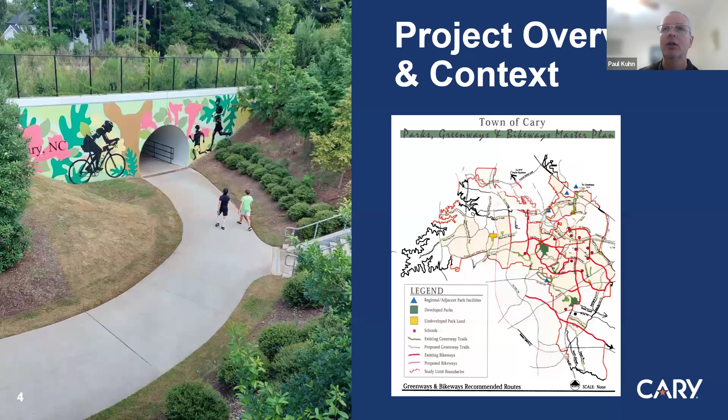Just to give you a bigger picture, around this time the East Coast Greenway was working on designating the alignment on the East Coast. When Cary heard about it, we wanted to jump on board and be part of connecting Maine to Florida, being part of that 3,000-mile trail. I'm pretty sure most people on this call are familiar with that, so I won't go into much more detail.

For Cary, we're approaching right around 100 miles of paved greenways within our trail network. In 2019, we celebrated 40 years of greenways within Cary. As Cary has grown, we've worked with development and developers to build many of those trails, and then some of the more challenging ones we've come back and built ourselves, and this is one of those. Cary currently has a population of roughly 180,000 people.

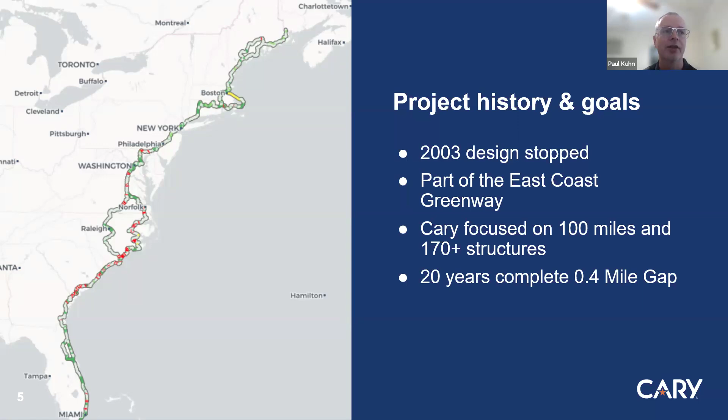On those 100 miles of trails, we have over 170 structures that we have to maintain, ranging from boardwalks, bridges, and tunnels. Our public works team is always looking at new projects and asking how we can reduce the maintenance we're having to do, because they're out there all the time maintaining them.

So around 2003, we were really focused on this map - you can see Cary in yellow. If you look closely, you can see the White Oak Creek Greenway labeled here, and then the Black Creek Greenway, connecting in Bond Park. This was really our big push, because we were trying to connect the American Tobacco Trail, which is on the west side of the county, up to Umstead State Park.

So Cary had those two great connections we could make. By making those connections, we were able to connect to Durham, Raleigh, and some of the other connections shown on this map, including the Neuse River Greenway, which is the trail on the far east side of the map and the east side of the county. That's obviously a big trail.

Raleigh's done a really good job with that trail connection. So being able to connect Durham to Johnston County was our goal. You can see this map was from when we were working on the project - we really had this one little gap that we needed to complete the whole network we had.

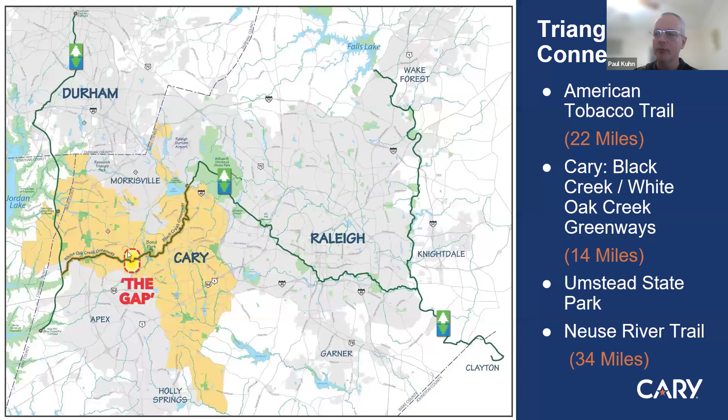We had a park over by Davis Drive that we would be going through, and you can see it was threaded through a narrow HOA property. When the neighborhood developed, they granted Cary an easement on this property. So that was part of Kimley-Horn's challenge, trying to thread this trail through that sliver of property along a creek - there's a sewer, and then there's a railroad. That's probably one of the biggest and most unique things about this project, working with the railroad.

For our elected officials, when we came to them and said, hey, we want to work on this project, we want to restart it because it's completing this big gap, they wanted to be part of the East Coast Greenway. They wanted to be part of something bigger than just something in Cary, so it was an easy sell to them.

I think everybody's probably familiar with the Appalachian Trail. So when you explain the East Coast Greenway as being kind of that urban version of it, it was a no-brainer for people to understand what we were trying to do.

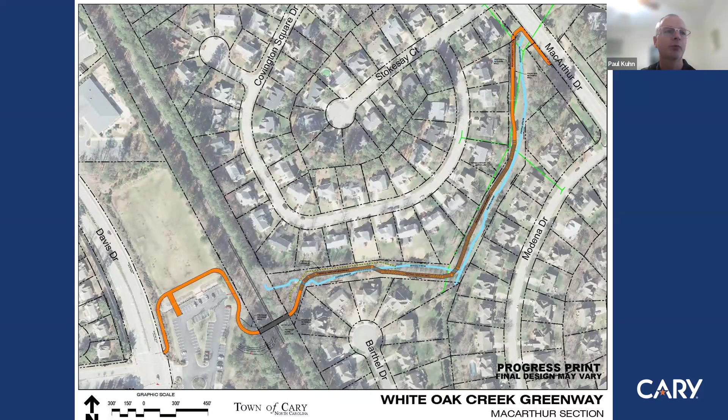So in 2012, Cary had a parks bond referendum for $15.87 million. A portion of that funding, roughly $2.5 million, was identified to complete this missing gap on the Greenway. The bond passed at 77% approval.

Once we had that money, that allowed us to start design and look to leverage that funding to go after other grants. So in 2015, we went after grant funding through NCDOT and our local MPO, and we ultimately got $3.8 million in grants. The total project cost was $9 million for this 0.4 of a mile greenway.

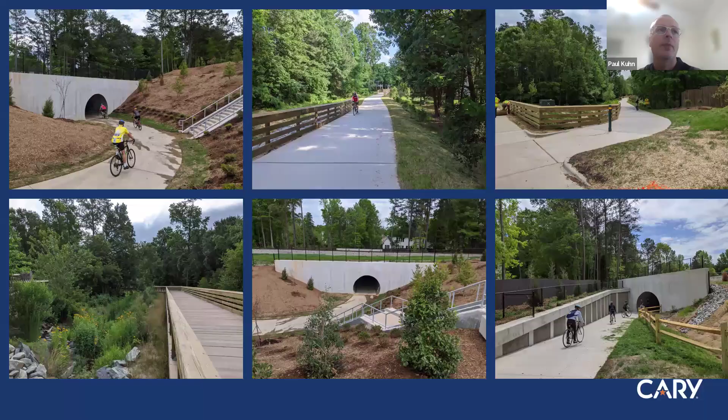Here's a few images we took relatively after construction was completed. You can kind of see the tunnel, some of the boardwalk, some of the connections that were made. I like looking at this picture now because if you go out there today, the vegetation, especially some of the trees near the tunnel, is really big.

That's what I love about North Carolina, vegetation grows really fast. So even though during construction we had to cut some trees down and disturb some areas, as part of the overall plan we replanted areas back, restabilized the stream, and naturalized it. Now it's almost a little overgrown, and we're only 5 years since opening.

To talk about our process and the partners we went through: Cary went through the request for qualification process, or RFQ, to hire a design team. We had 5 design teams submit proposals saying, hire us and we'll design this project and get you across the railroad tracks along the stream corridor and figure that out.

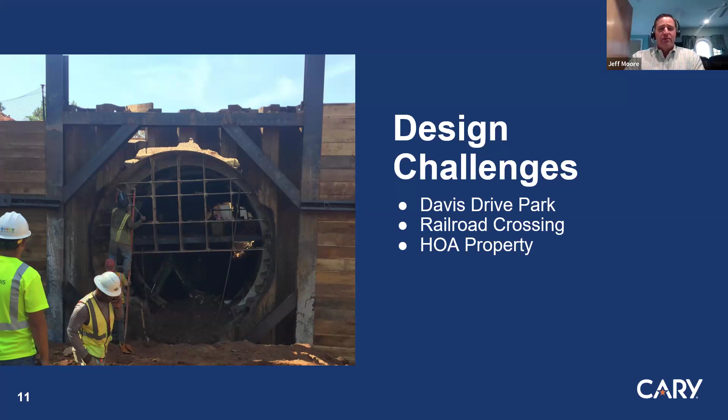Navigating through Davis Drive had some challenges. On Davis Drive, there's a large soccer field that is a FIFA soccer field, meaning the Federation Internationale de Football Association. They are very persnickety about the size and arrangement of their courts, so we had to make sure we met their guidelines and requirements.

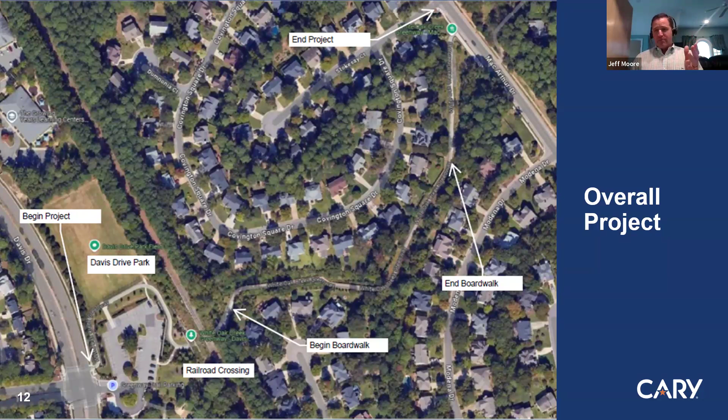We were also able to use the parking lot area for temporary construction and staging, which was very helpful for the contractor to lay down materials. We also had to build a 10-foot tall black vinyl coated chain link fence with 20-foot netting at the top to hold back all the soccer balls within the field.

So those are just small little details that we worked out as far as the design is concerned.

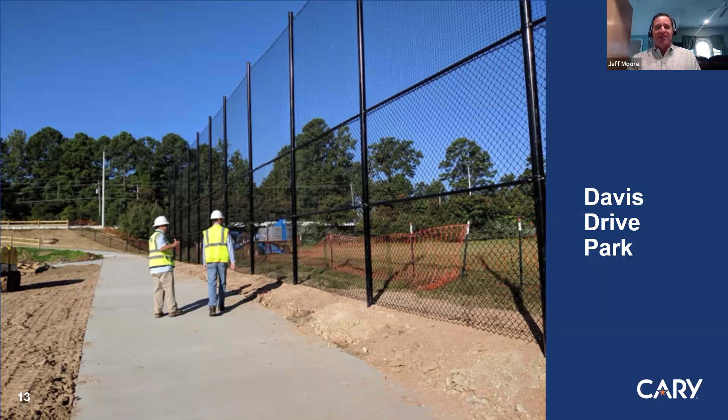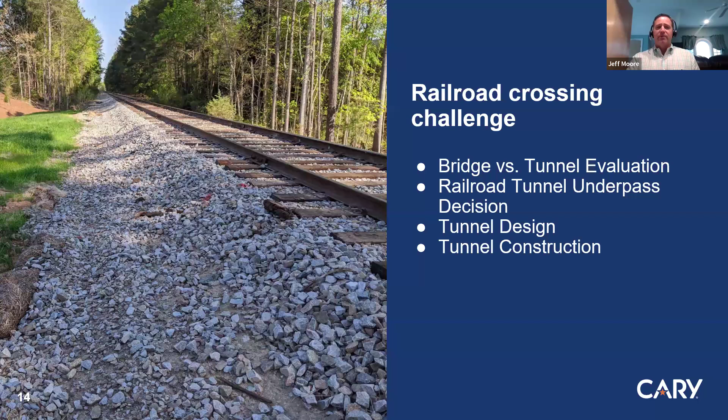So the railroad crossing, as I mentioned, was one of the biggest challenges. With those, we evaluated whether to go over or under the railroad. That was kind of the first evaluation we did when we first got started. I'm going to talk about how we came to that decision, some of the factors that went into it. Then I'll focus on the design of the tunnel and then the construction of the tunnel.

From the underpass component, we investigated looking at an overpass as well as an underpass to cross Davis Drive, as well as cross CSX Railroad. We looked at combinations of both to try to figure out how best to navigate this area to make the connection that we were seeking.

Both overpasses of the railroad required a pretty significant structure, and elevation-wise it was going to be at the height of the second floor bedrooms along the trail on the residential side. So not the best option there. We did the planning for the Davis Drive crossing that I mentioned, and the town hopes to move forward with that sometime in the future. But the town ultimately decided not to construct a grade separation at Davis Drive, but instead focus on the railroad underpass at CSX based on our evaluation.

So our proposed methodology was to construct what was called a tunnel liner plate pipe, and place that under the CSX railroad. The biggest advantage of that is we could do that without interrupting CSX operations. They have trains coming through this area each day, and it was imperative that we not interrupt that operation, and the tunnel liner plate construction was able to do that.

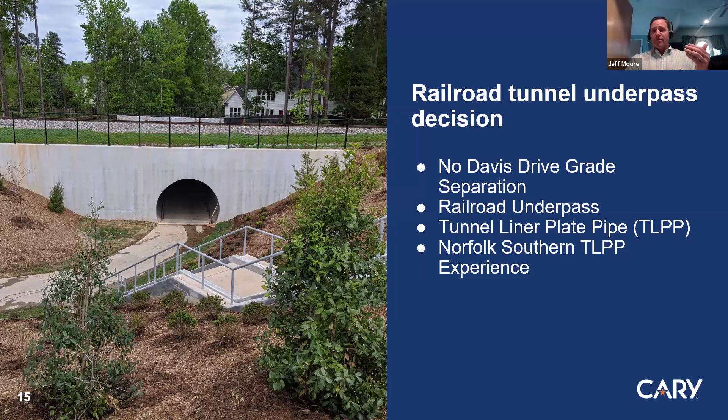You'll notice the experience of our team - our subconsultants, STV, had actually developed a tunnel liner plate solution under a Norfolk Southern Railroad in Suwanee, Georgia, and brought that experience into this.

What they basically do is have a machine that digs about 18 inches into the dirt. Once they've excavated that, they put those tunnel liner plates together all around in a circular fashion, basically 18 inches at a time. They do this 24/7 until the operation is complete - that's the CSX requirement. They'll excavate enough to go 18 inches, bolt that together, and go another 18 inches and bolt that together.

I think Paul, they were able to do this in less than a month, just because they were able to go do it nonstop. Rock's always a big problem that we run into, but just under this area we were able to keep trucking pretty quickly. 17 days is what it took. So 17 days, and this is a 100-foot long tunnel in 17 days.

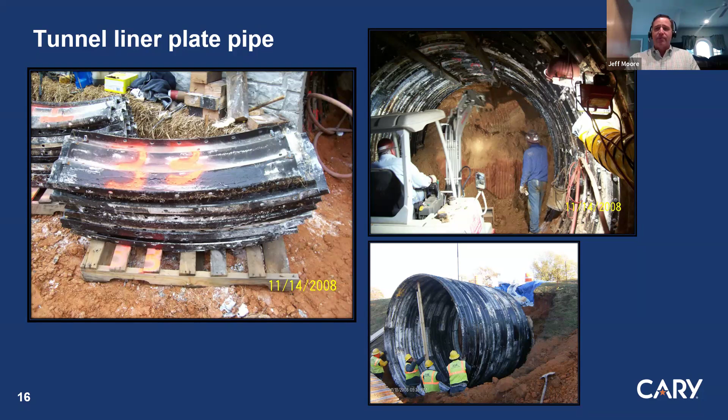That's right, yeah. So this is a picture of the Suwanee, Georgia application. We shared those with the town during our interview process to show them our experience of doing this. And I thought they looked great for the presentation, for the Great Trails State.

As far as the tunnel design itself, we had to span the entire railroad right of way. It was 100 feet long, so our tunnel was actually 102 feet - just adding another foot on either end - so that this allows CSX to be able to expand their rail tracks if they need to in the future without having to touch our structure. It allows them latitude to move the existing track over and add a second track. And I'm also going to talk about the ballast to plate minimum depth.

Talk a little bit more about the plate pipe type and size. I've got a slide for that. Talk about that continuous operation, and then wrap up the tunnel design with drainage.

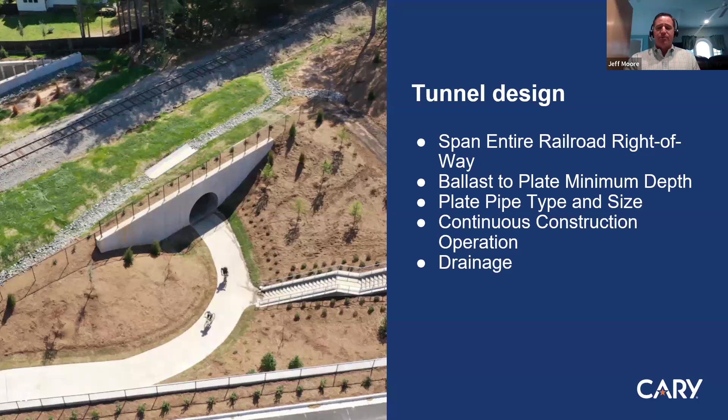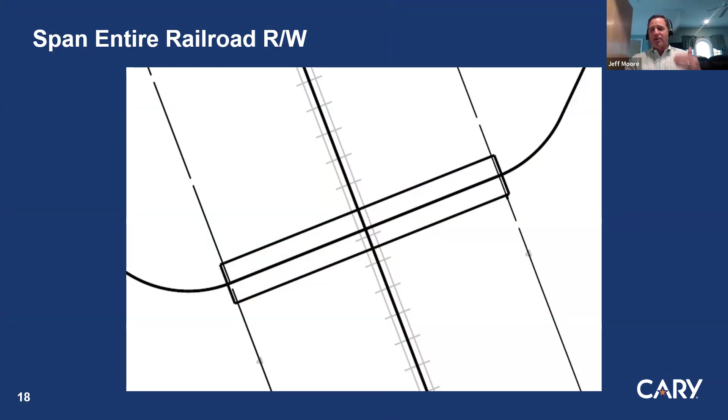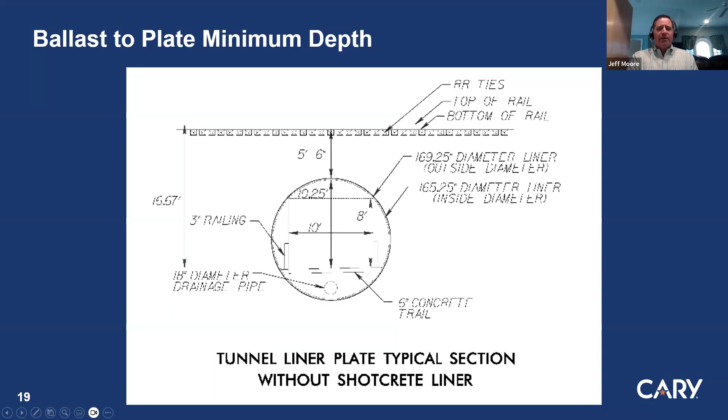Next slide. And there's the drainage pipe in there too. That's right, so the drainage pipe is what we'll talk about in this next slide. By putting in a 14-foot diameter pipe under the railroad tracks, that's a lot lower than everything else, so we had to drain it. We set up a system to drain the sag, basically a 1% grade coming out of it, which took a few hundred feet to drain it to this outlet and connect it to the existing stream.

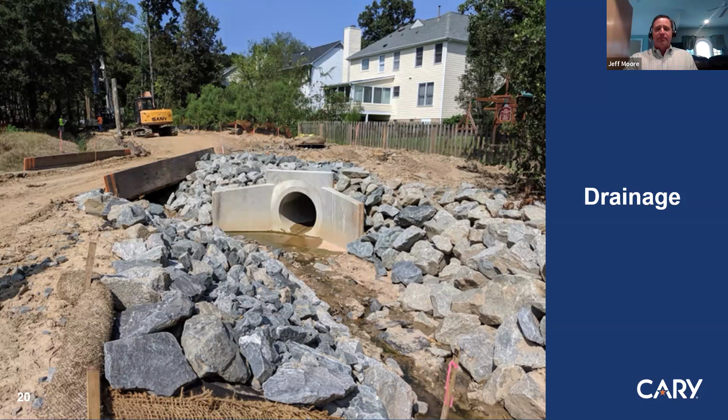Next slide. So this is just a quick slide to show something we realized during design: in order for the contractor to actually build this, we can't just start on one side and work your way to the other. The contractor has to have access on both sides. So we worked out a temporary crossing, put in the provisions for it, and got permissions from the railroad company to be able to do that. That opened up the door for them to work on both sides, and from an access perspective it was huge.

Next slide. So these are some tunnel construction slides. I'll start on the left side, which shows the sheet piles that were constructed to allow excavation for the tunneling operation, and the tunneling machine before it begins operation. In the bottom right is one of my favorites, because it shows the tunnel operation but also shows the railroad on top. So the railroads were able to go over our operation without hindrance, and that was huge.

Well, it was a requirement. It was obviously not just important, but it was a requirement, something we had to do, and this operation allowed us to do that.

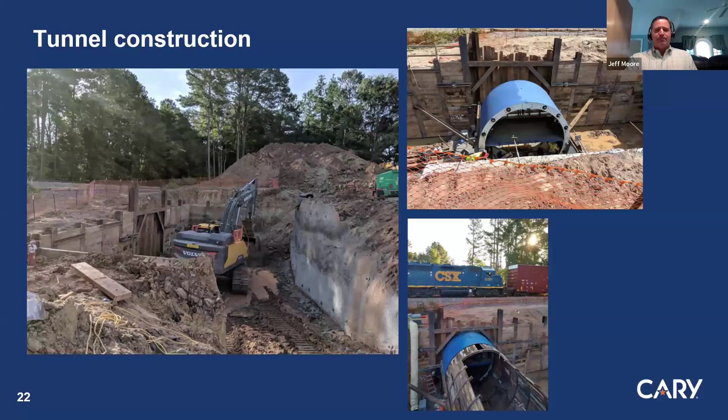Next slide. So the image on the left shows the workers inside the tunnel, probably putting in grout or checking the nuts and bolts of how it comes together. The images on the right show continued operations of bringing grout and concrete in and out of the tunnel, and the bottom right shows our actual project as it broke through to the other side.

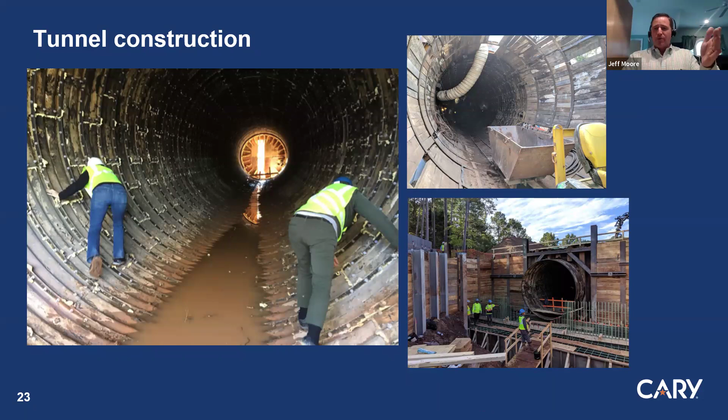Next slides. That shows the grout operation at the very end, after they had placed the walking path and the railings on each side, putting in a grout, Shotcrete type situation to protect the tunnel from water. The upper right shows that as well, with a little bit of water in the walkway as it's coming through. The bottom right shows the final product, what it looked like the day we opened the trail, with bikes already using it.

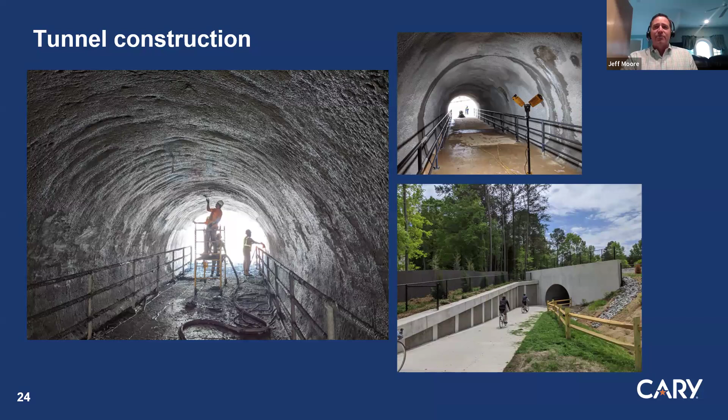So great to see that happen almost immediately. Now I'll finish up with the homeowners association property and how we threaded the needle.

We had a very limited area to operate in. There was an existing sewer line, existing stream, and wetlands all over the place. So really, a boardwalk was the only logical solution, and Jason will finish that up here in a few minutes.

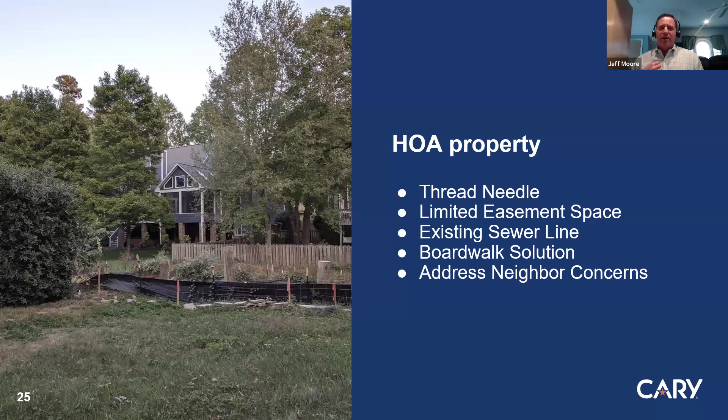We also had to address neighbor concerns. When the developer developed this residential community, they dedicated 50 feet to the town for a greenway, which is great, but there's a stream and a series of wetland pockets right in the middle of the 50 feet.

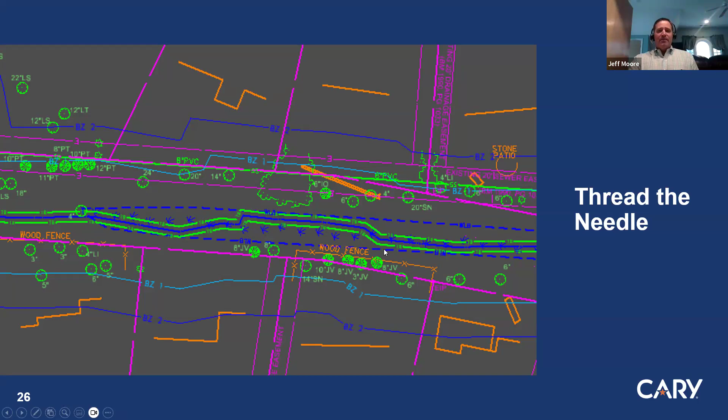And then, as you can tell, the stream just kind of meanders—it's not straight. On the southern side it's kind of in the middle and meanders through. The next slide shows you our solution.

We basically developed a boardwalk alignment to minimize impacts to the wetlands and thread the needle through there to get the project permitted.

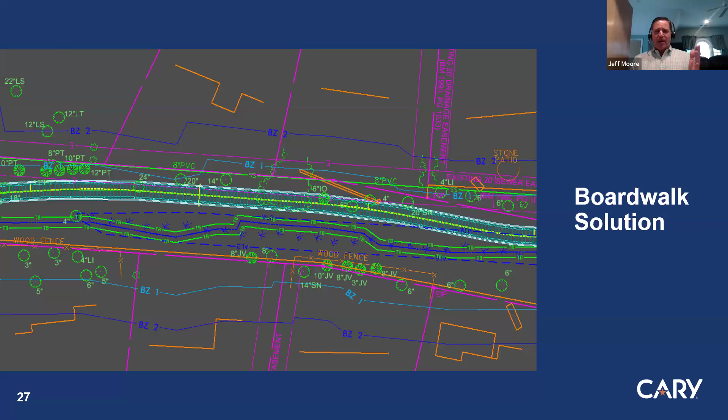Another thing that came up was the neighbors. The developer provided a 50-foot easement, and we kept our trail and boardwalk within the easement, but it backs up to the properties, so they expressed concern about privacy.

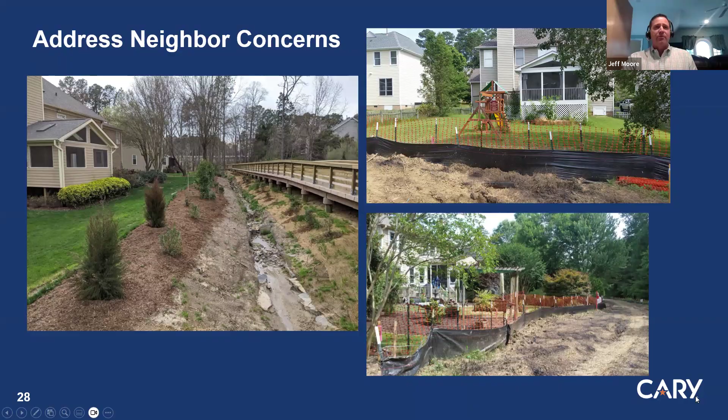Thank you, Jeff. Jeff did a great job setting up the challenges that we, as a boardwalk supplier and designer, were faced with. I'll basically cut to what the solution was.

One of the requirements for the Town of Cary is that the surface be slip resistant, and also that the material of the boardwalk be a durable, long-lasting product.

Our PermaTrak system is a completely precast concrete boardwalk system. The beams, treads, and caps that attach to the piles are all precast concrete, and it comes as a modular system shipped out on a truck. A railing system can be added to change the look of the boardwalk if you want.

What I'll do in the next half a dozen slides is show you how those pieces come together, how we traversed the stream and the easement, and how we got through that. The process started with PermaTrak's team.

We have a team of engineers here in Charlotte, and we communicated with Jeff's team at Kimley-Horn, and it became an iterative process. We began with understanding what the limitations were and where the footprint needed or wanted to go.

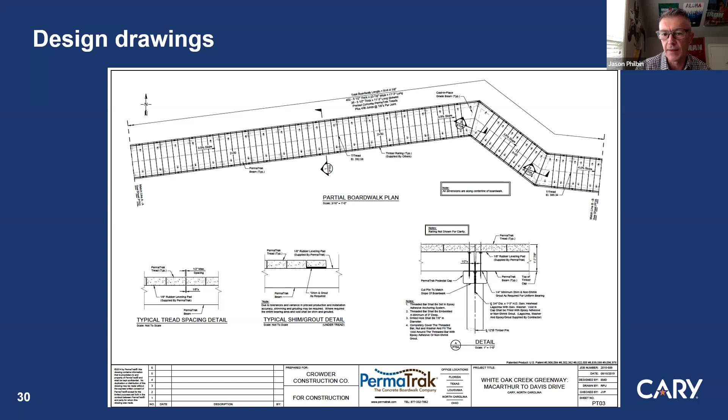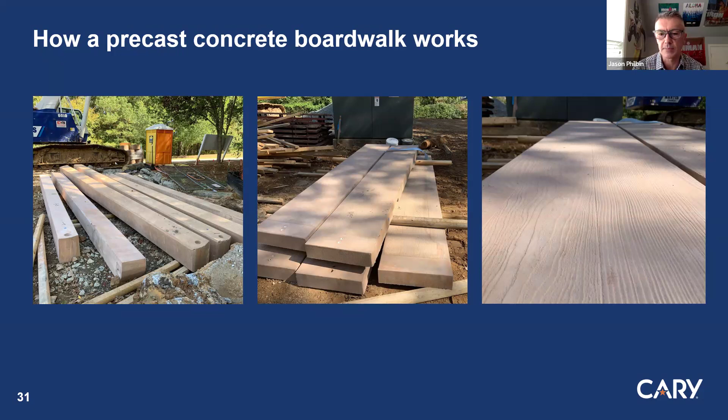The town also chose the color, a tan color we call Melbourne tan, though we offer a couple of different colors. So this is Melbourne tan with a timber texture, and the tread you're looking at is 2 feet wide by 11 feet 3 inches long. Imagine walking down the boardwalk, you'd have a joint every 2 feet, just like if you were thinking about a timber boardwalk with joints every 2 feet, but with our PermaTrak system.

So this is what it looked like before the PermaTrak arrived. The contractor hired Span Builders, a local smaller construction company in the Raleigh area. They installed the timber piles, starting on one end and backing their way out. They were able to drive the piles from the ground. Then, based on our drawings and feedback from Jeff's team, we established the cutoff elevation on top of the pile. Once the pile is cut, the first PermaTrak piece goes on, which is a circular cap.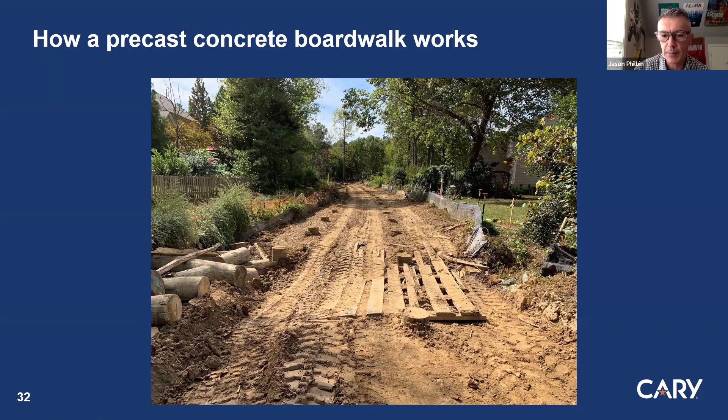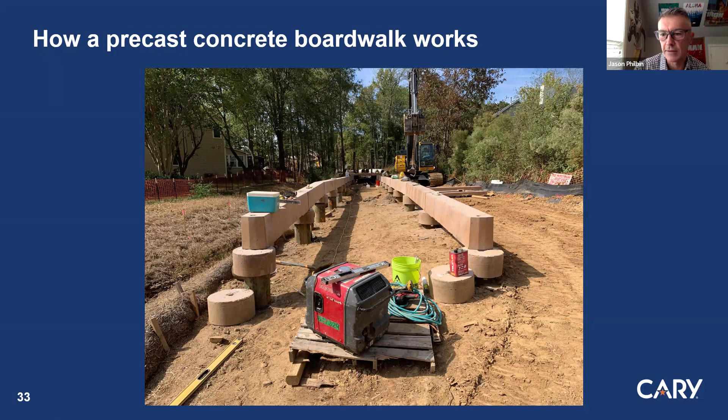This is a close-up of what it looks like. Look at the cap, the circular piece on the bottom. There's a recessed hole in the middle, and a through-bolt, a lag screw, gets sent through the hole and is twisted and fastened to the top of the timber pile. That secures the cap to the pile.

You'll also notice what looks like a little piece of plastic on top of the cap. That's just an identification mark for the NCDOT, which inspected this product, so it's NCDOT approved. You'll see those pieces on a lot of the components there.

Now, on top of the cap is the beam. That beam is 14 inches tall and spans 24 feet. So it's a 24-foot long beam, 14 inches tall, 10 inches wide — a precast concrete beam. Now look on top of the beam.

That also has a hole that allows for a lag screw to go through, which is drilled and epoxied into the top of the cap. That's what secures the beam to the cap.

Once the beam is set, we lay down a rubber leveling pad, which you cannot see in this picture, but it runs the entire length of the beam. That helps prevent some rocking of the treads as they sit on top of the beam. Now the tread, remember, is the piece that sits on top of the beam, running from the right side of the picture to the left. You'll notice the joints between the treads every 2 feet, which is where the PermaTrak treads sit.

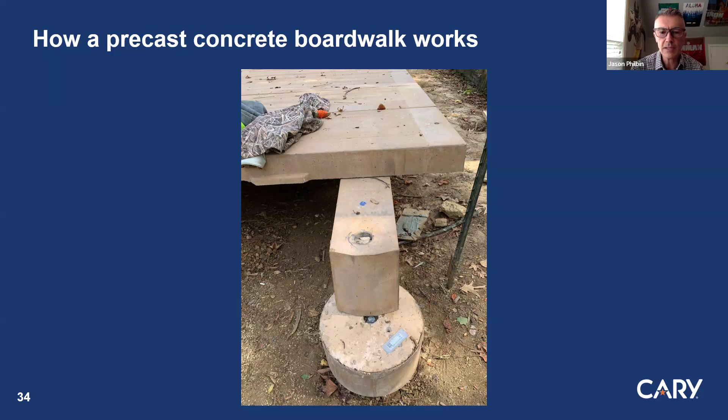Okay, let's go to the next page, Paul. That's how the system goes together, and it's very repetitive. After you set one span, you're repeating the process: you set 2 caps, you set 2 beams, you set a number of treads until you get to the next span, and you continue on.

So a turn down slab detail is used, and it rests on top of a poured in place grade beam. The grade beam runs from the left side of the greenway to the right side, and it encases 2 piles at the very beginning point of the boardwalk. That's something we designed. The contractor poured it in place, and once the boardwalk is set, that turn down slab is then poured.

It's a really nice detail because nothing's perfect in the field. Once the precast is set, if it's off a little bit, a little short or a little long, or if our precast is off in our manufacturing process, the turn down slab will hide all of those imperfections. So it may not match up exactly, but the turn down slab makes it look like it was all intended to be exactly that way. That's a good detail that's worked out well for us.

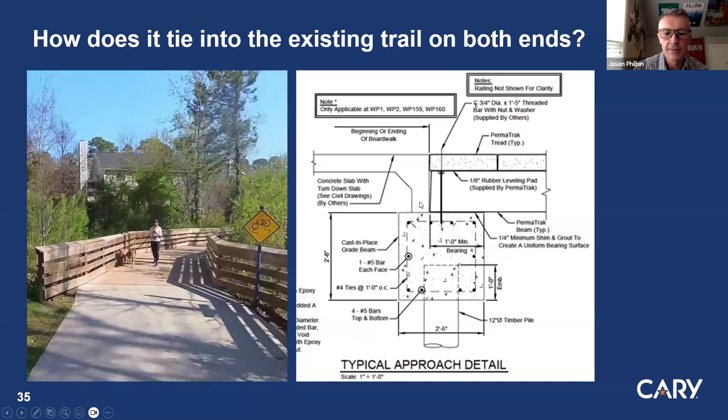Okay, next slide, Paul. One of the other challenges I mentioned was, as the boardwalk had to turn left and right and avoid the stream, we had to adjust the span length. We would like to produce the beams all the same length. In our world, the precast world, repetition is where you make your margins. But when we start changing things, we have to think differently, and it slows the process down.

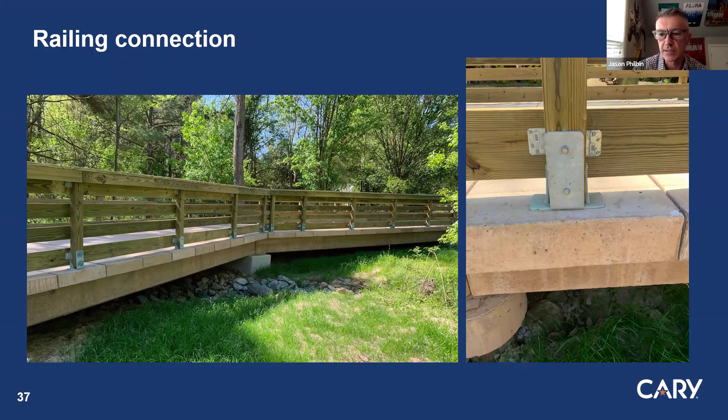Next slide, Paul. And you know what I'll say about the boardwalk system, it was 915 feet. We produced that product in probably 6 weeks. An installation like that, the setting of the precast could be, well the precast itself could be installed in about a month. Typically, you think about installing about 50 feet of boardwalk in a day. Some contractors are better than others.

Crowder did a very good job, and Span Builders was the installer. They did a good job at installing that. Once the piles were in place and the caps were in place, the boardwalk system went together quite smoothly. All right, well, thank you, Jason and Jeff, for diving into the details a little bit more.

So to wrap up here, we started construction on this project in 2019, which means we finished during COVID-19. So we were at least able to open up the trail to the public. And we know during COVID, the use of trails was very instrumental, getting people out, that type of thing. So we were super excited that we could at least open it up.

We weren't able to do a typical dedication event at that time because of trying to keep space and everything. But what was exciting that did happen was, if you're familiar with the North Carolina Weekend TV show on PBS NC, they actually came out and did a 4-minute segment on it and posted it on one of their shows.